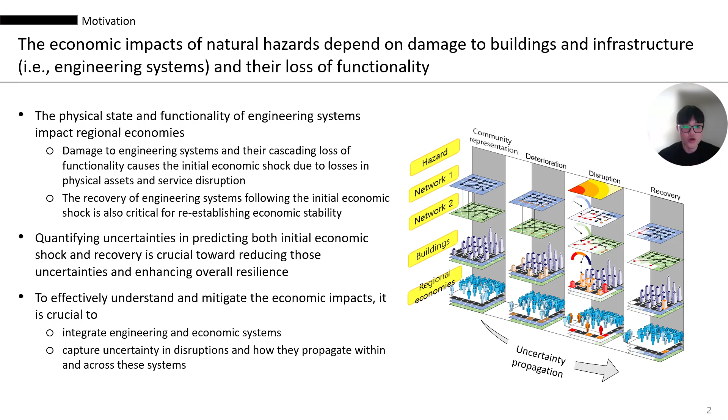So why do existing regional risk analysis tools fall short? First, there is a lack of integration between engineering and economic systems. Engineering research has mainly focused on modeling hazards and their impacts on interdependent engineering systems, considering economic consequences in terms of direct damage cost. Economic research has focused on adapting general macroeconomic models to capture potential shocks within economic systems posed by hazards.

And quantifying uncertainties in predicting impacts on regional economies has not been accounted for. This process includes the propagation of uncertainties from hazards through to damage and functionality assessment of engineering systems and economic systems.

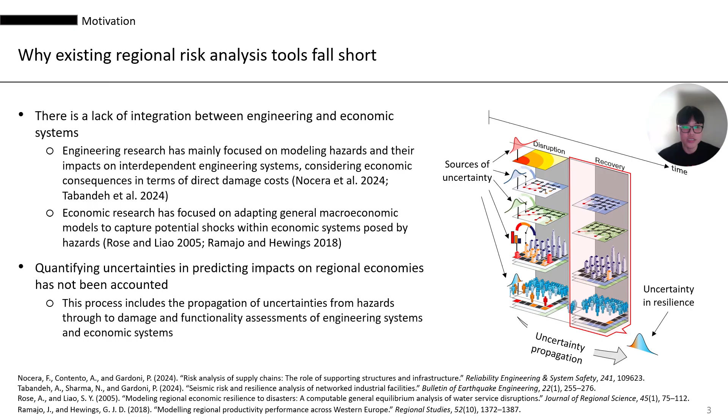So we develop a multi-level probabilistic computational workflow for regional risk analysis of interdependent engineering economic systems. The computational workflow captures the full chain of interdependent engineering economic systems consisting of hazard analysis, damage to interdependent engineering systems and their loss of functionality and subsequent recovery, and the initial economic shock and post-disaster economic recovery alongside the physical state and functionality of engineering systems.

By propagating uncertainties throughout the workflow, we quantify uncertainties in predicting the initial economic shock and post-disaster economic recovery. We then identify main sources of uncertainty that significantly influence both the initial economic shock and post-disaster economic recovery using global sensitivity analysis.

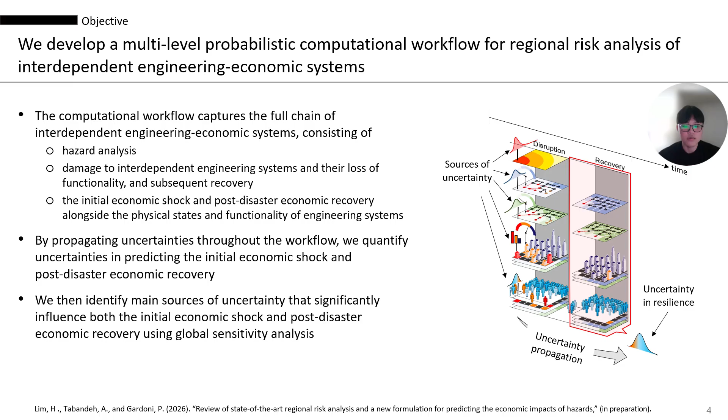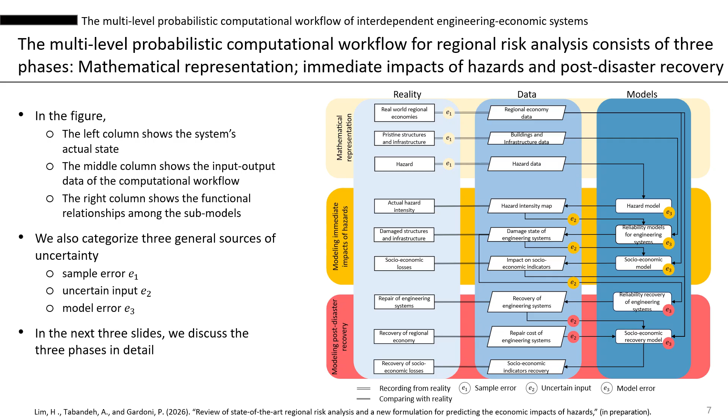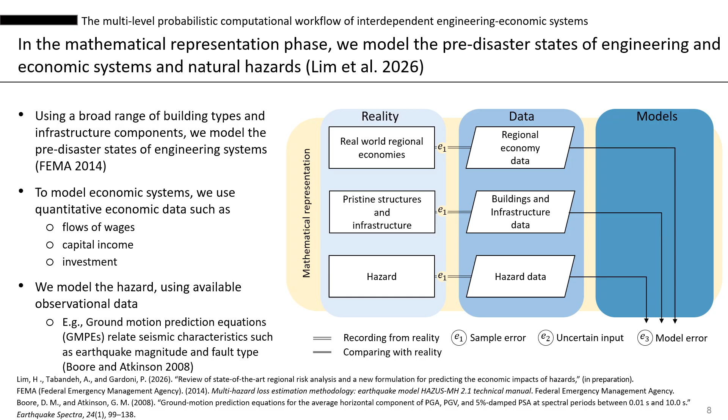First, in the mathematical representation phase, we model the pre-disaster states of engineering and economic systems and natural hazards. Using a broad range of building types and infrastructure components, we model the pre-disaster states of engineering systems. To model economic systems, we use quantitative economic data such as flows of wages, capital income, and investment. We model the hazard using available observational data. So for example, ground motion prediction equations relate seismic characteristics such as earthquake magnitude and fault types.

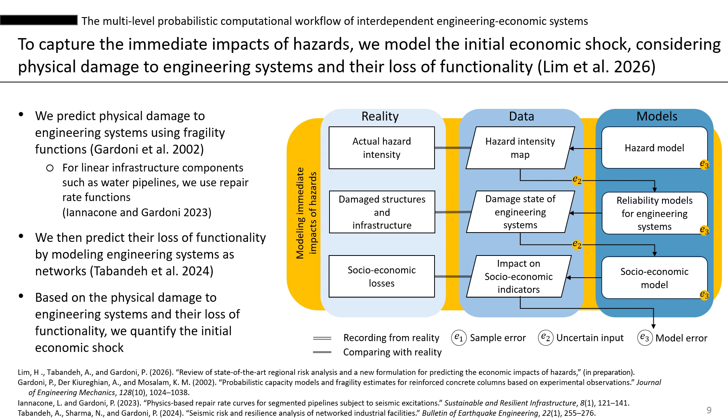Next, to capture the immediate impacts of hazard, we model the initial economic shock, considering physical damage to engineering systems and their loss of functionality. We predict physical damage to engineering systems using fragility functions. And for linear infrastructure components, such as water pipelines, we use repair rate functions instead. We then predict their loss of functionality by modeling engineering systems as networks. And based on the physical damage to engineering systems and their loss of functionality, we quantify the initial economic shock.

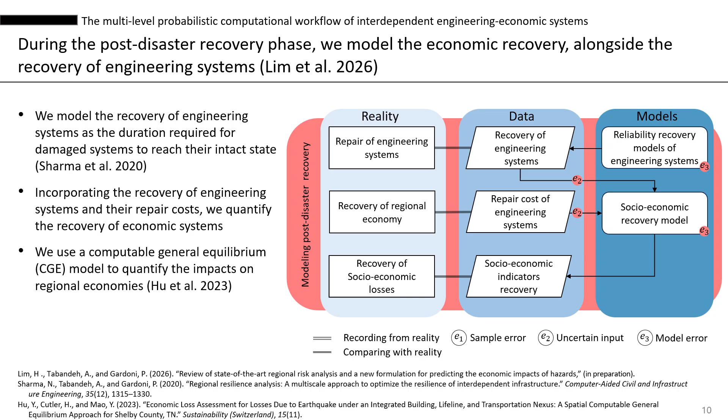During the post-disaster recovery phase, we model the economic recovery alongside the recovery of engineering systems. We model the recovery of engineering systems as the duration required for damaged systems to reach their intact state. Incorporating the recovery of engineering systems and their repair cost, we quantify the recovery of economic systems. And here we use a computable general equilibrium, in short CGE, model to quantify the impacts on regional economies.

The CGE model represents regional economies by capturing complex interactions among industries, including relationships between price and the supply and demand of commodities. CGE analysis is a quantitative methodology in regional economic modeling for impact and policy analysis. The CGE model represents the simultaneous optimized behaviors and interactions between economic agents, which are households, firms, and local government. Capital stock and productivity are key parameters to quantify impacts on regional economies in the CGE model.

So first, we quantify the initial economic shock by accounting for damage to engineering systems. Here we consider capital stock loss to quantify the initial economic shock resulting from damage to engineering systems. We use the appraisal values of engineering systems to quantify their capital stock loss. We also include essential components in infrastructure, such as power generators, transformers, and substations in power infrastructure, and booster pumps, pumping stations, tanks, and pipelines in potable water infrastructure.

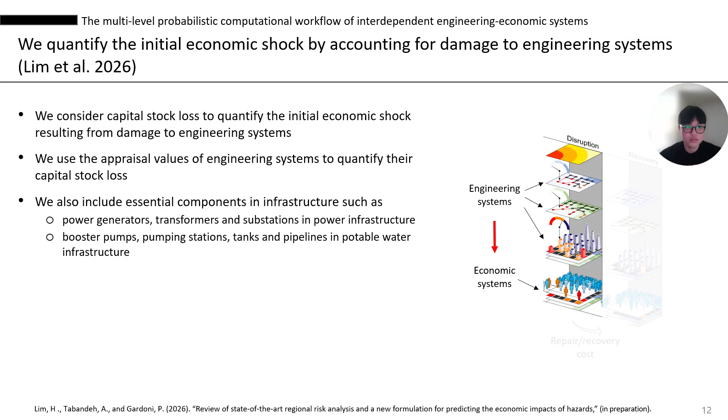We also account for the functionality loss of engineering systems. Infrastructure provide essential services to other industries for production, such as power and water. And essential services affect how efficiently industries transform inputs into outputs. Service disruptions due to the loss of infrastructure functionality reduce this efficiency.

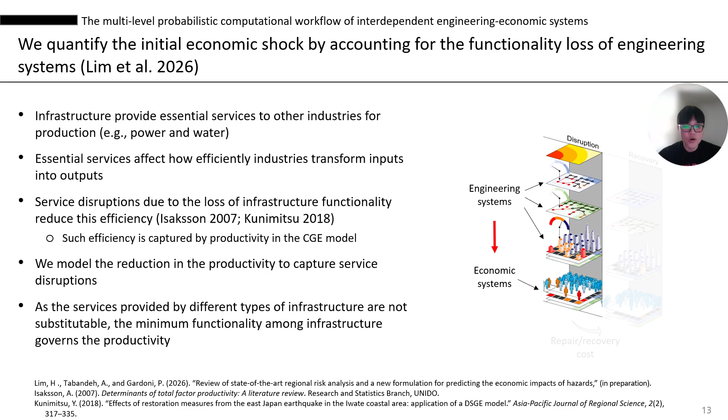And such efficiency is captured by productivity in the CGE model. We model the reduction in the productivity to capture service disruptions. As the services provided by different types of infrastructure are not substitutable, the minimum functionality among infrastructure governs the productivity.

We also quantify the post-disaster economy recovery by incorporating the restoration of engineering systems, including associated repair cost. The total repair cost is categorized into the Federal Repair Fund, local repair cost, and insurance, reflecting the respective entities responsible for payment. So for example, in the US, FEMA approves the Federal Repair Fund for the region subjected to hazard.

For commercial buildings, the local repair cost is paid by local industries. For public infrastructure, the local repair cost is paid by local government. The repair cost affects time-dependent capital stock recovery and economic supply-demand equilibrium in the region of interest.

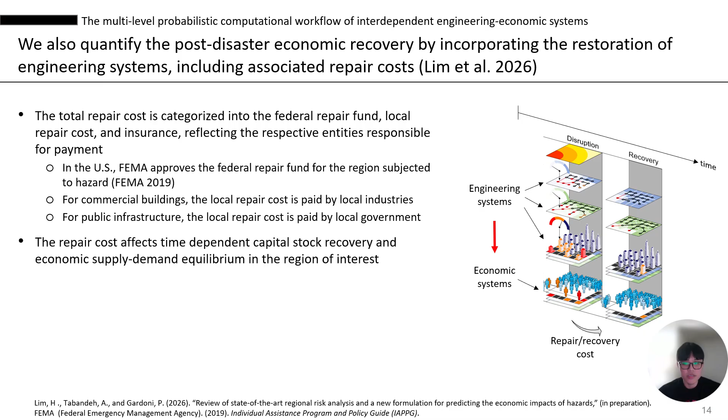Throughout the workflow, we use a formulation for the uncertainty propagation to quantify uncertainties in predicting economic impacts and identify the main sources of uncertainty. Tabandeh et al. developed a multi-level uncertainty propagation approach to reduce the problem dimensionality and a variable grouping approach to reduce the number of model evaluations in the regional risk analysis.

The idea of a multi-level uncertainty propagation is to use the hierarchical structure of the computational workflow to express it in the form of function compositions and then perform sensitivity analysis for nested functions. The idea of variable grouping is to reduce the number of simulations for sensitivity analysis.

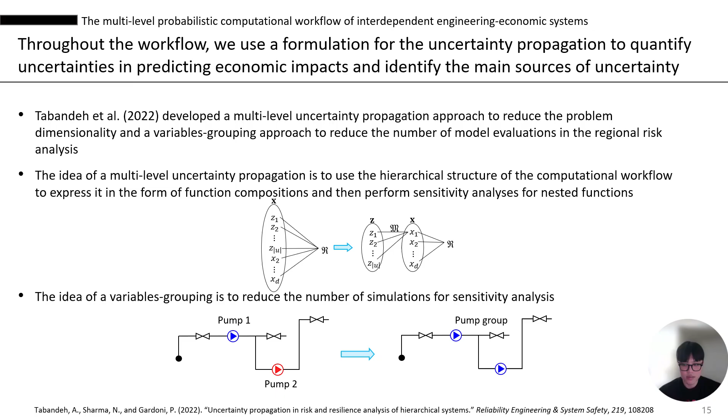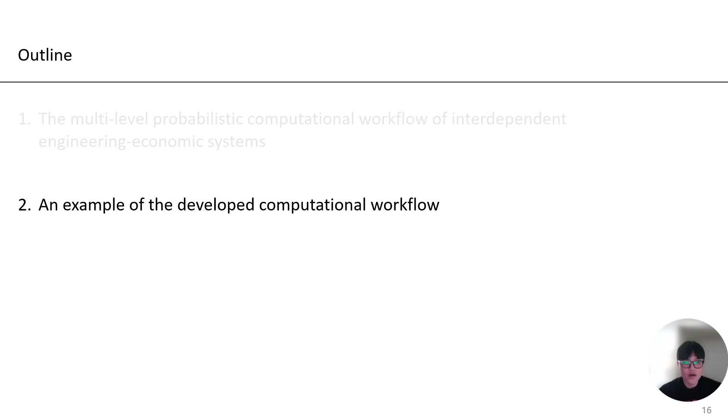So far, we've discussed the theoretical part of the multi-level probabilistic computational workflow, and let's move on to an example of the developed computational workflow. Here, we implemented the developed workflow on Shelby County, Tennessee. The example considers 300,000 residential and commercial buildings and power and potable water infrastructure subject to earthquakes originating from the New Madrid seismic zone.

And in the subsequent slides, we discuss the sources of uncertainty in the workflow from seismic hazards to post-disaster economy recovery, and the quantified uncertainties in predicting resilience metrics of regional economies, and identified the main sources of uncertainty.

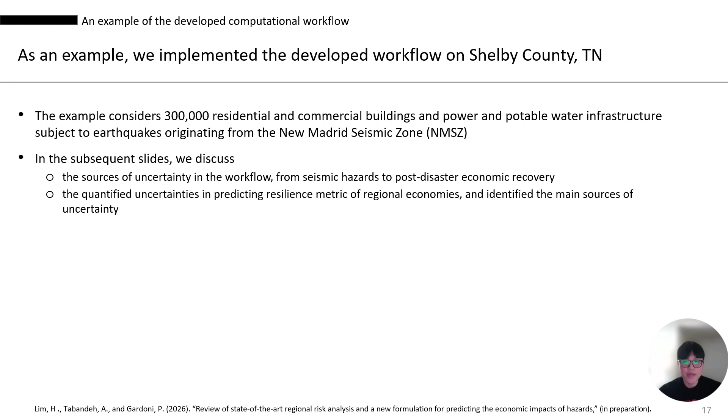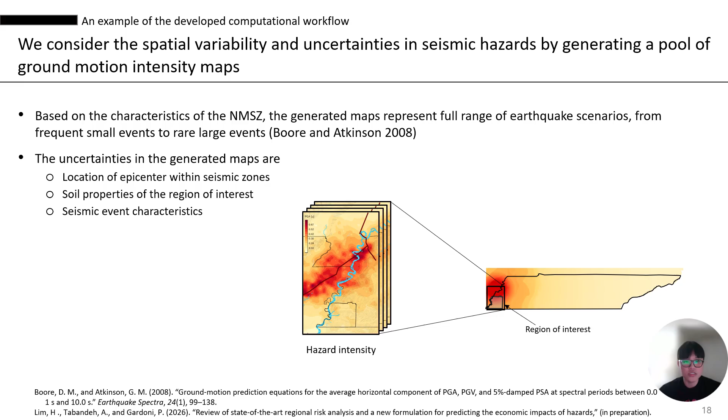First, we consider the spatial variability and uncertainties in seismic hazards by generating a pool of ground motion intensity maps. Based on the characteristics of the New Madrid seismic zone, the generated maps represent the full range of earthquake scenarios, from frequent small events to rare large events. The uncertainties in the generated maps are location of epicenter within seismic zones, soil properties of the region of interest, and seismic event characteristics.

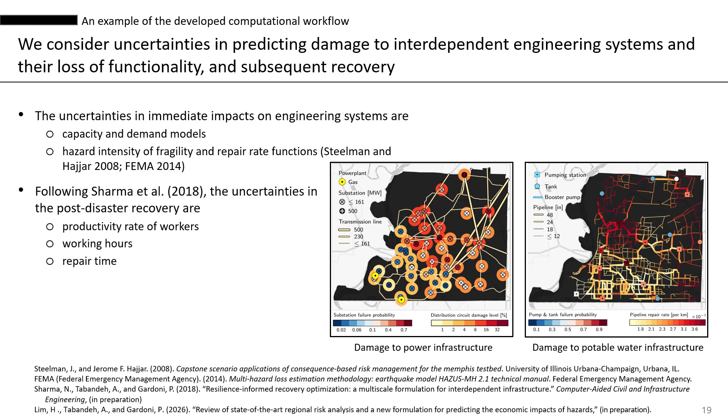Next, we consider uncertainties in predicting the initial economic shock and post-disaster economy recovery alongside the physical state and functionality of engineering systems. We translate damage to engineering systems and the cascading loss of functionality into reduced capital stock and productivity. The post-disaster economy recovery is predicted by incorporating the recovery of engineering systems and their repair cost.

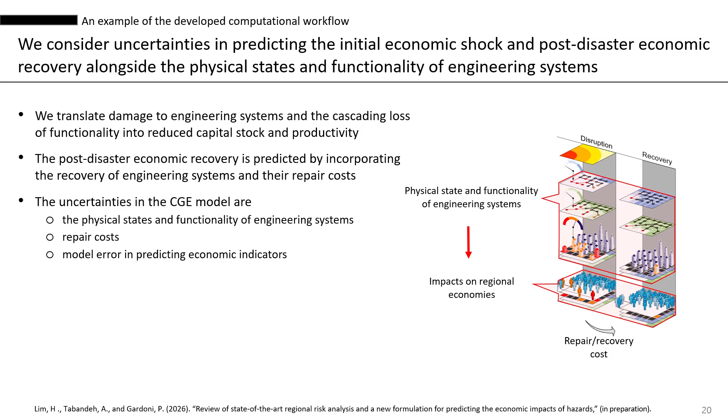The uncertainties in the CGE model are the physical state and functionality of engineering systems, repair cost, and model error in predicting economic indicators. The results show the level of uncertainty in predicting resilience of regional economies and the main sources of uncertainty.

Following the PDF of resilience metrics of regional economies, accounting for infrastructure increases the recovery time and uncertainty because service disruptions due to the loss of infrastructure functionality result in significant impacts on the resilience of regional economies. And also based on sensitivity indices, the groups of the damage and recovery functions of buildings and water pumps are the main sources of uncertainty.

This is because buildings and water pumps contribute most to capital stock and productivity respectively. Also, we can observe that CGE model error and hazard intensity are other main sources of uncertainty.

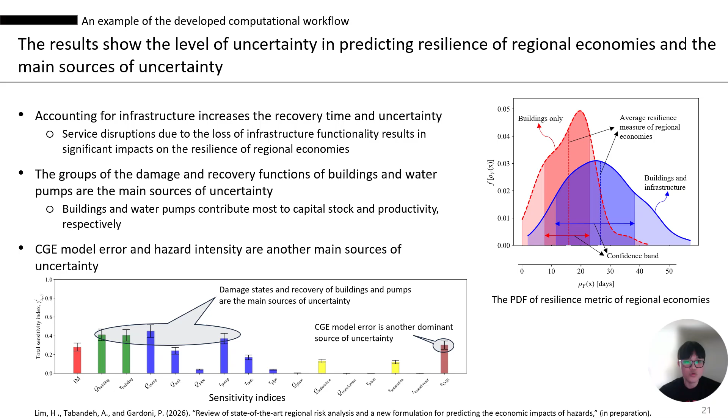So here is the conclusion. We developed a multi-level probabilistic computational workflow for regional risk analysis of interdependent engineering economic systems. The computational workflow quantifies impacts on regional economies, propagating uncertainties from hazard to post-disaster economic recovery.

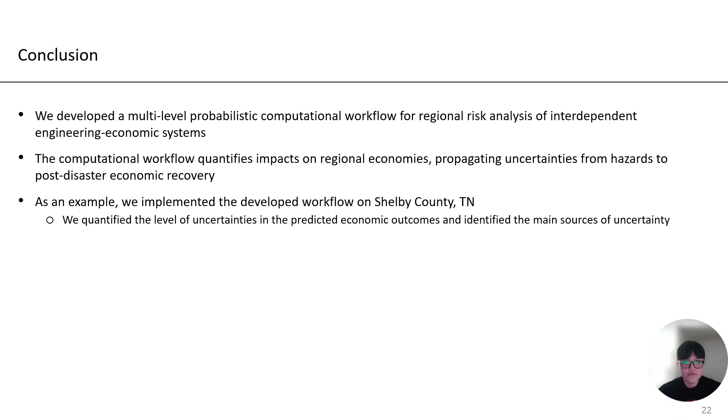And as an example, we implemented the developed workflow on Shelby County, Tennessee. And in this example, we quantified the level of uncertainties in the predicted economic outcomes and identified the main sources of uncertainty.

As future work, we can apply the developed workflow to other hazards, such as hurricanes and wildfires, and also other regions, because depending on the types of hazards and regions, the main sources of uncertainty may vary. Also, we can incorporate additional socioeconomic behaviors, such as migration and workforce change, into economic systems. This is because these behaviors influence both the uncertainty in the initial economic shock and post-disaster economic recovery.